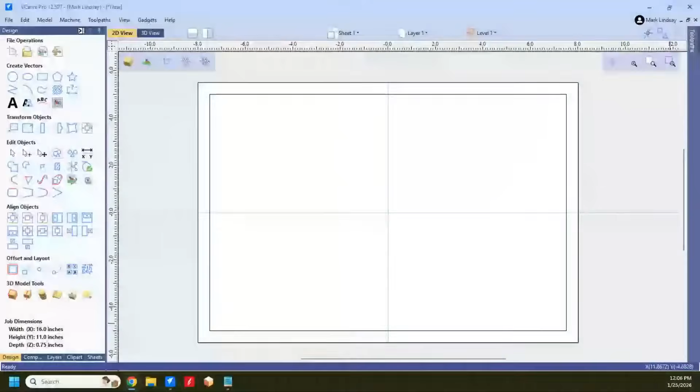Let me bring up VCarve Pro. Yeah, I'm in VCarve Pro, and I'll try to show you what I'm talking about. What I have here is a simple piece of material. You can't really see what's going on out here on the outside, but let me select, and you see I've got a vector out here that is the same dimensions as my material. Then I've got another vector right here, which is the limits of the pocket.

What I want to do is machine this area away all the way around the piece. It's, let's say, an inset panel, I'm using my hands like you can see me here. Let me do that. There we go. It's an inset panel that's going to fit into something else, but have a border around, an overlap. So let's go back to a spotlight on this.

So here's what we're going to do. Like I say, I've got that vector there and I've got this vector here. So I'll select them both, and I want to pocket this whole area out. Now I'm going to cut 1/4 inch deep, and I'm going to use a 1/4 inch end mill. In this case, the direction really doesn't matter. I'm going to use offset simply because I want it to go all the way around the material. And we'll go ahead and calculate that pocket.

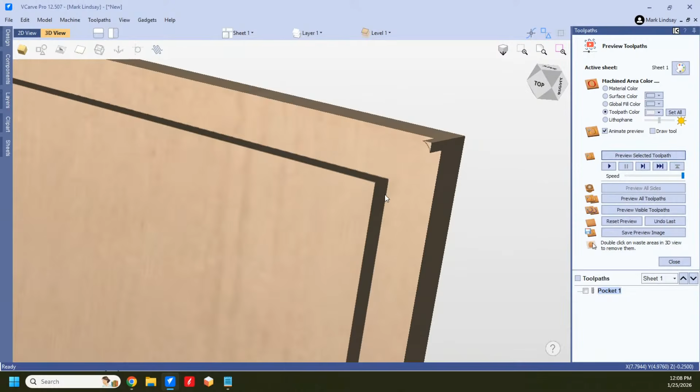I'm not going to get into the minutia of a pocket. There we see what the toolpath is going to cut, and now we'll preview the selected toolpath. Okay, now it's finished. The first thing we see is it has left these little corners up here. That is simply because we have to take into account the radius of the bit. It's going to come in.

Let's turn on the vector. It can't get into this corner, and this vector is the limit. So it's going to come up here as close to that corner as it can, then it's going to come around and go inside. This is the limit of the radius of that bit. It can't get in there any closer.

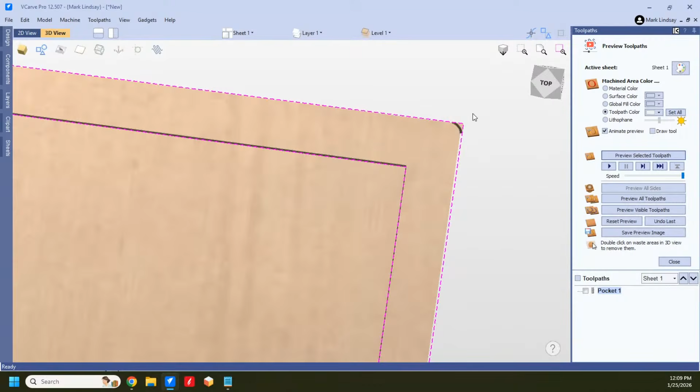So that's all well and good, but if we look down here, and I'll turn the vectors off so we can see, we have this ridge of material here. If we look a little closer, we also have this ridge of material here. Now this is common. And he was asking, why does it do this? What's the reason for this? Because we don't have the ridge over here on this side, and we don't have the ridge up here at the top. We just have it on this side and down at the bottom.

Now, I have asked about this in several places, and I get 2 or 3 different answers. So I don't have a definitive answer on why this happens. I've heard that it has to do with the radius of the bit. The radius of the bit explains the corners being left behind, but it doesn't explain why we have this ridge of material left behind down here and over here, but not up here and over here.

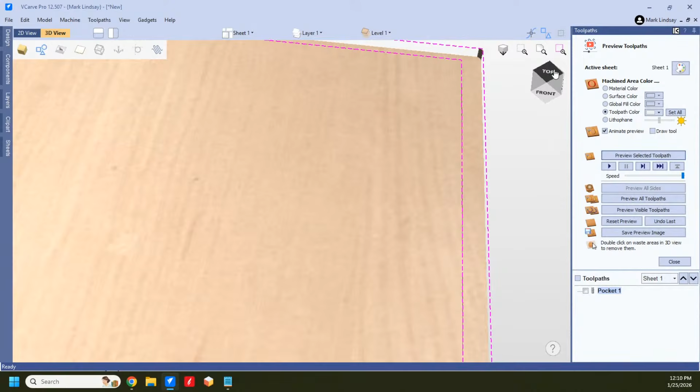I've also heard that it has to do with the way the toolpath is calculated, that it's calculated by using the center of the bit and where this vector here is. Now, if we zoom in straight from the top, we can see this vector kind of hangs over this edge a little bit. It's beyond the edge. Same thing up here, but it's right on the edge down here and right on the edge over there. Now, to me, that doesn't make sense. So it doesn't explain everything.

Now, Vectric says rounding errors. That's possible, but it doesn't explain the inconsistency. That's my question about the whole thing.

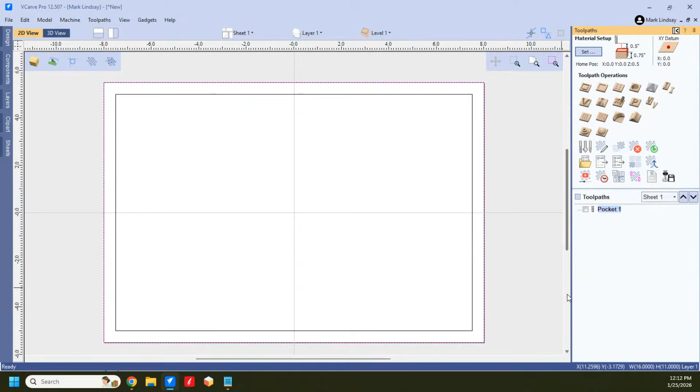Let me close this and we'll jump back over into the 2D view, back over to the design tab here. I'm just going to select this outside vector because that's the problem, and I'm going to, again, align it to the center to make sure that it is centered. So I have aligned it to the center. I'm going to jump back over here and recalculate that pocket. We'll reset the preview, and we'll see if that made any difference.

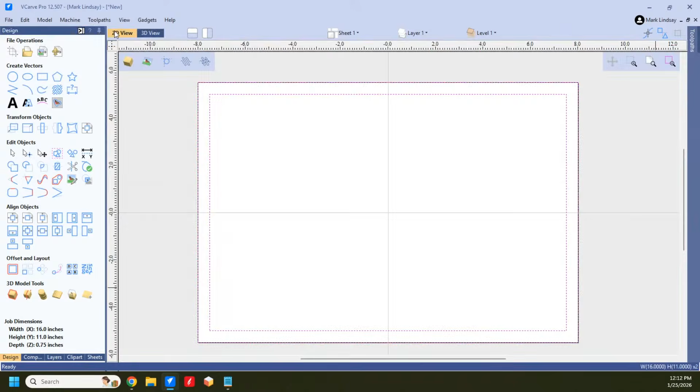And it did not. So obviously, that vector is centered. So what's my point in all this? My point in all of this is if you're going to create a pocket, like in this case, to create this rabbet, and the same holds true. Let me jump up here, close this to get out of the preview, jump back into the 2D view. The same is true if you're, let's say, creating a dado here for some reason. And we will make the width 0.5. Apply. I want a 1/2 inch dado across here.

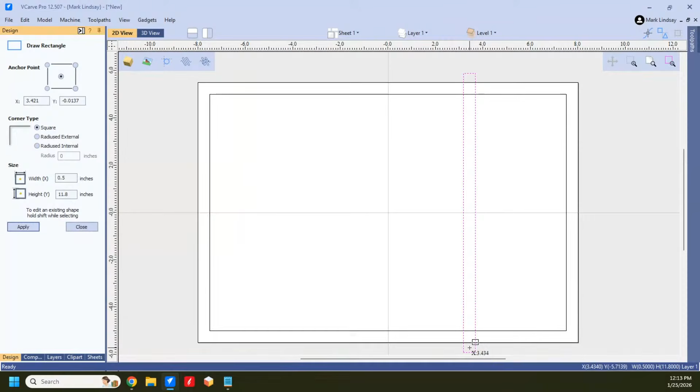Now, foreshadowing. You see here that this rectangle goes way beyond the material. It does that for a reason. That is, I want that bit to go past this edge and carve this away. I want it to go past this edge and carve all the way through this, not leaving that ridge of material. Now, I can change this. I'm in move and transform mode. Let me go ahead and bring that up and line it up right there. So it's going to end right on that edge, rather. And I've got it selected.

Let's pocket this down. Let's go 3/8 of an inch, so 0.375. And we'll calculate that. And we'll preview it. And we see it does the same thing. Now, I expected that radius, but it left that ridge there again. But if I look up at the top, that ridge is gone. And there's no ridge here. And that's simply because I made that rectangle larger than the desired cut.

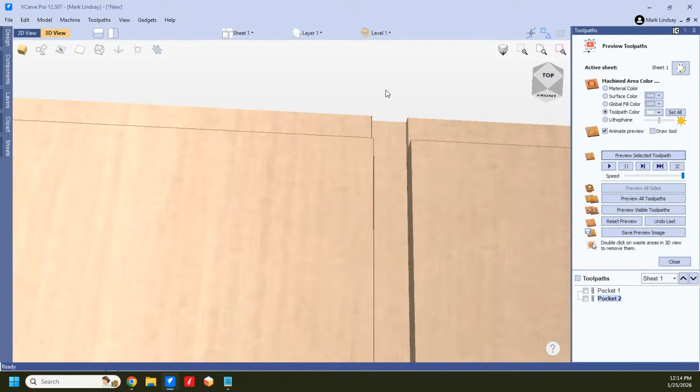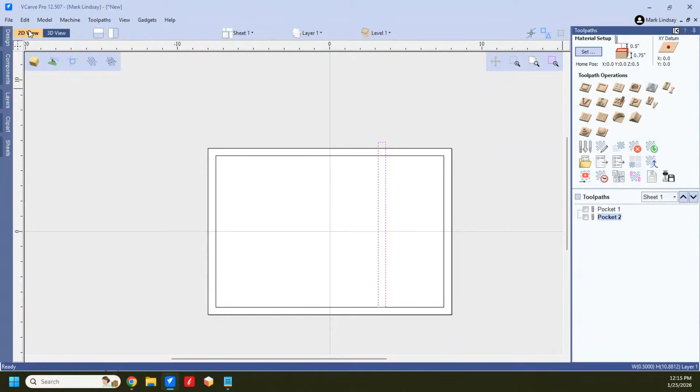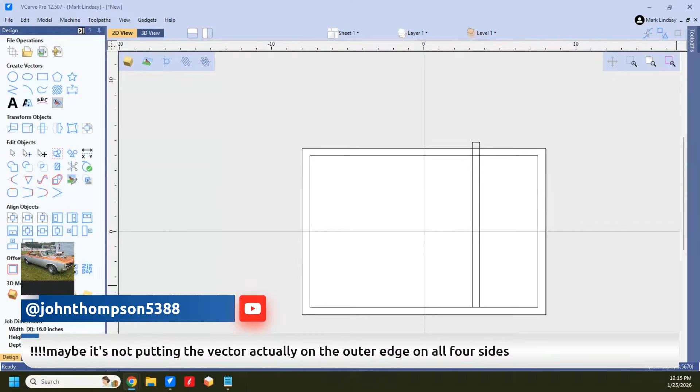So, I cannot explain why it does this. But it's been this way. I was taught to do this from the very beginning. If you're dealing with an example like this, let me go back over to the design tab here, where you have a ridge of material being left behind, and you have those radius corners that are not being machined away, the cure for it, basically, is to, okay, John Thompson says, maybe it's not putting the vector actually on the outer edge on all four sides. Yes, and that's what I was talking about earlier. I don't understand why it's doing it. I've been told two different theories, but nothing definitive. So the only thing I can say is we need to make this outer vector larger than the desired cut.

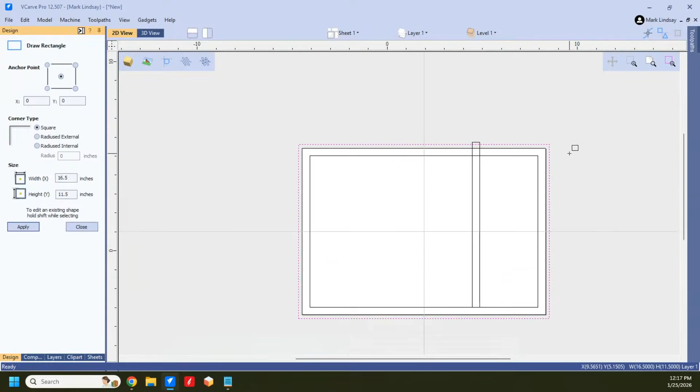So what I'm going to do is, I've got the rectangle selected, I'm going to go back into create rectangle. Now, any change that I make here is going to be reflected on the entire vector. So I'm going to add the diameter of the bit to all four sides. Because my anchor point is the center, I'm going to double the diameter of the bit. In this case, it's a 1/4 inch bit. Double that, we've got a 1/2 inch. I'm going to add a 1/2 inch to both of the dimensions. So we'll go 0.5 and 0.5. Then click apply. Now, that vector is a 1/4 inch larger here, and also at the top and bottom.

So I can close that. Oops, I added another vector. Didn't mean to do that. Now I'm going to put this one into move and transform mode. Click it again. And I'm just going to drag it out to where it's about the same as the larger vector. And I can drag this one in, snap it to that vector. And there we go. Whoops. No, I didn't move it. I did enlarge it. Okay.

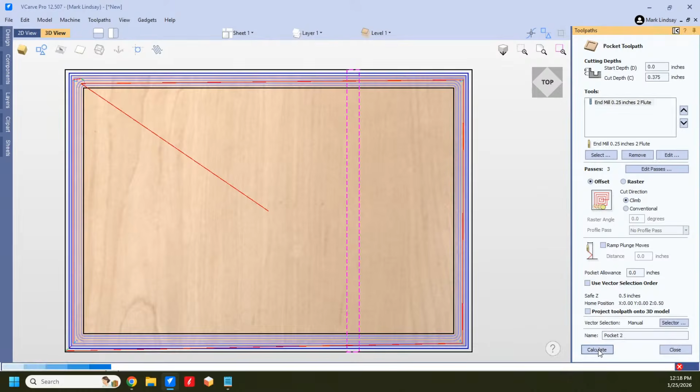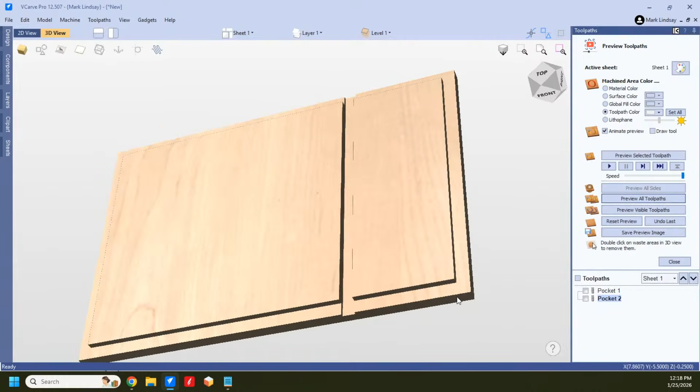So now I've got these. I can go back and recalculate the tool paths. So I'll go into this one. It has selected the two vectors. Recalculate. Go into this one. This vector is selected. I can recalculate. So now, when I preview them all, I get a nice clean dado, and I get nice clean edges, and those radius corners are gone. I don't have that ridge of material anywhere. It's nice and clean.

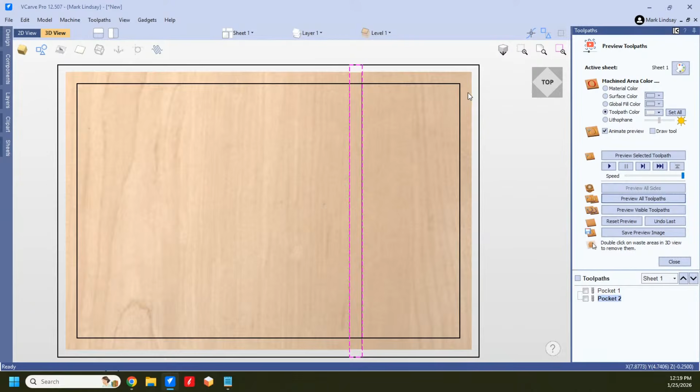So, it could be considered a workaround, or it could just be considered standard procedure. It is considered standard procedure if you want to get rid of those radius corners, to make the vector larger than it needs to be to cut away that corner. And you make it larger by the diameter of the bit. Now, that does mean it'll cut a little bit of air out here, and it may cut a little bit of air right here, but it eliminates those corners, it eliminates the ridge, and it eliminates the need for hand tool work after the fact.

Now, Bruce Malmstrom is asking, could you just use offset to the outside? Yes, you could. You certainly could just offset it to the outside.

As my friend Michael Mazalik likes to say, there are 3 answers to any question. This is what my English teacher would call foreshadowing. But yes, there's 3 answers to every question. So it could be anything from the radius of the bit to how the toolpath is calculated based on the center line of that bit or the center point of that bit.

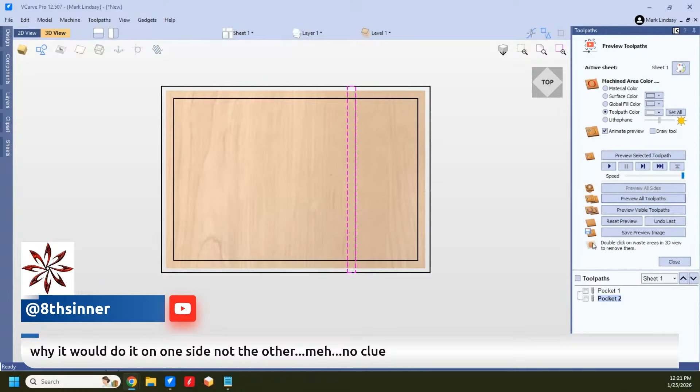Or it could be the tolerances number in preferences, that ridge perhaps being 0.006, for example. And that could be as well. That very well could be. And that's my question as well. Why would it do it on one side, not the other? No clue. Exactly. Does that explain why the ridge on one side and not the other? You know, I mean, you're a devious man, Michael.

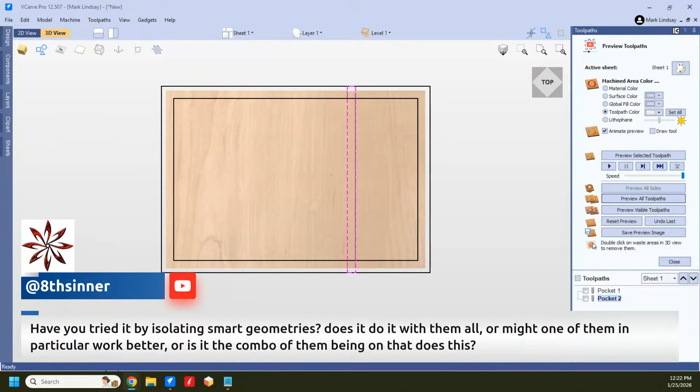Let's see here. There was another quote here. There we go. Have you tried isolating smart geometries? Does it do it with them all? Or might one of them in particular work better? Or is it a combo of them being on that does this? Isolating smart geometries, what I'm guessing you mean by that is, for instance, making separate pockets here and up here, and then separate pockets here. Yeah, that could be done as well. But again, there's no guarantee that it's going to cut the whole thing. And then you're dealing with two toolpaths rather than one.

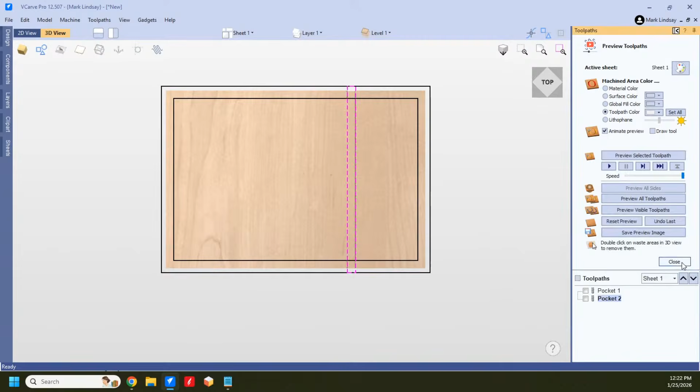Yes, you can combine them. And yes, you can merge them even. But I guess what was bothering me was the why. Not so much what I can do to get rid of it, because this is what I can do to get rid of it. Yes, I could offset that one outwards. If I want to keep that vector for some reason, maybe that vector needs to be a profile cutout to make sure this piece is perfectly rectangular. So there is a valid reason for keeping that vector right on the edge of the material.

So if I do need it, then offsetting it and not deleting the original is a good option. But if I don't need it, then just resizing this vector is another option. So it's, again, one of those little things that, let's see here. Jim Brown says, will that ghost vector be there on the dado as well? I'm going to have to assume, simply because I don't have an answer for that, if there is a ghost vector outside of the vector here, it would be the same for this vector.

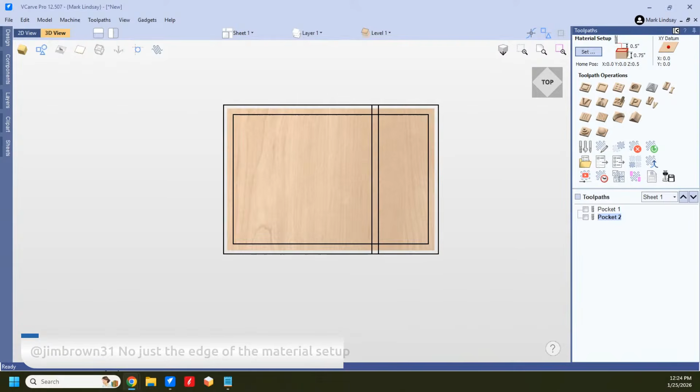So, okay, Mezalick says, no, just the edge of the material setup. Okay. Yeah, it's strange. Like if the bit geometry is 12 pixels, but the size is measured to be 11 pixels. I get that. Well, but that wouldn't show up in the preview. That would just be outside on the machine. The point is, in all of this, that I really don't have a definitive answer. There are lots of good variables. Each one of them could contribute just enough to where that's the end result.

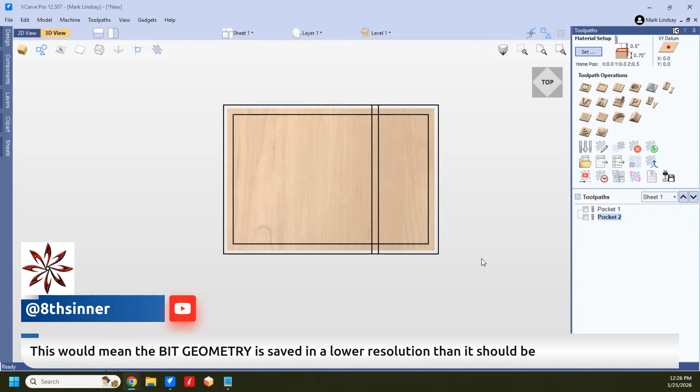But to me, it doesn't explain why it only happens in certain positions. Like in this example, that ridge was along the left side and the bottom, but not the right side and the top. So this would mean that the bit geometry is saved in a lower resolution than it should be. The only problem with that theory, and I'm playing devil's advocate here, is that it wouldn't explain why it's only happening on 2 of the 4 edges. If the bit geometry is saved at a lower resolution than it should be, that ridge should be on all 4 sides. So you may be 100% correct, but that doesn't explain why it's only 2 sides.

Does this mean that if that's an inside dado, one side will be undersized? It could very well be. It could very well be.

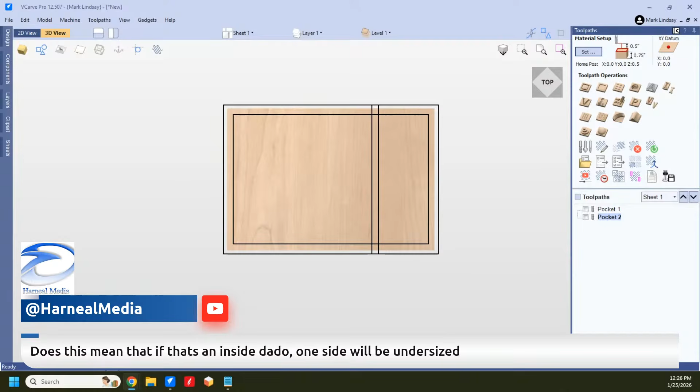So, dados are, I won't say they're a separate science, but dados can be difficult to get. Aha, here we go. Michael, I think you've got something here. The software reads from left to right, bottom to top. So those are the first edges to be calculated. It's all falling into place.

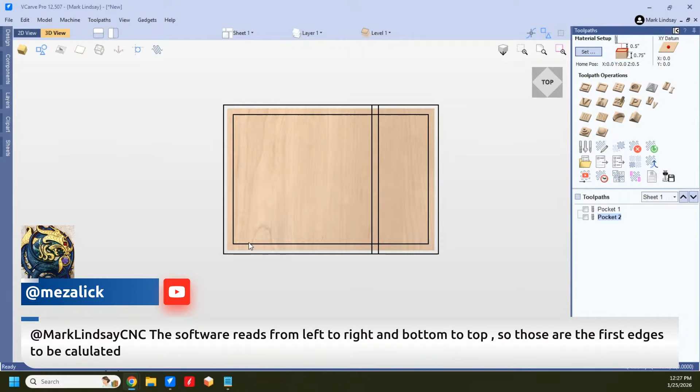So if there is a ghost pixel, oops, I'm pointing at the wrong screen. So if there's a ghost pixel, let's say down here on this corner, it's going to move that edge in 1 pixel to the inside. Interesting. Interesting. I'm going to have to play with that. Very interesting. Okay. Yeah. Man. Yes, the ghost pixel will always be only on the same 2 sides.

Now, you know, Michael, that's some brilliant insight and something that I had never considered. Now, I knew that the software, when you're creating a 3D model or a composite model in VCarve, when you've got 3 or 4 different components, I knew that it modeled from the bottom up. But I did not know it calculates the toolpath starting at the bottom left corner.

Says in older versions of the software, you could see the ghost pixel. Interesting. I don't know if I ever noticed that. I started with the trial version of VCarve Pro 7.5, learned a little bit, and bought VCarve Pro 8.0. And I don't remember seeing it, but I didn't know to look for it, you know.

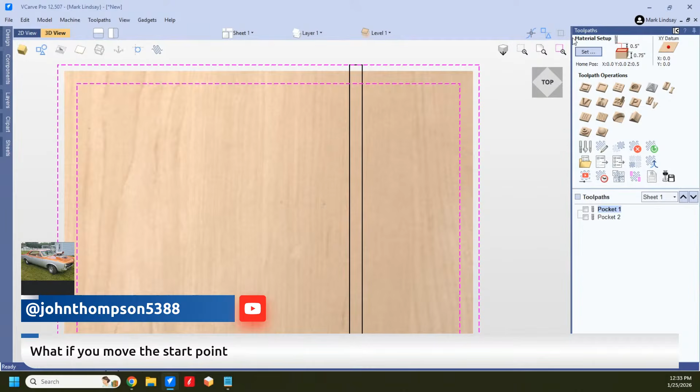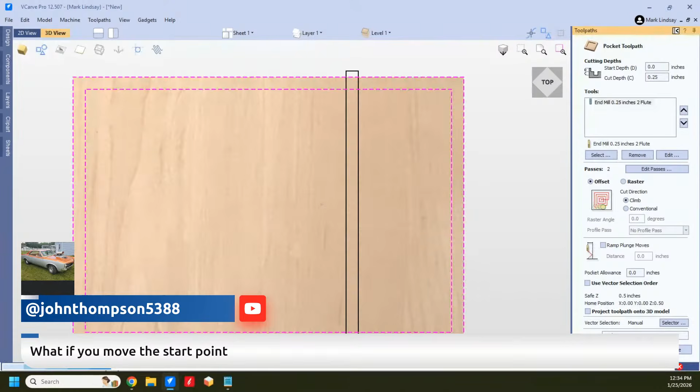Nope. Oh, nope. Let me reset the preview, close the preview, and now go back over to the design tab here. Select this one and get rid of that 1/2 inch. All right, apply, close, shoot over here, and we'll back into that pocket. We'll recalculate it, and we'll see if moving the start point up to here changes it. Boom, boom, boom. No, moving the start point does not change it.

So, all right. So, no. Start points don't matter with pockets. Okay, I see that now. All right.

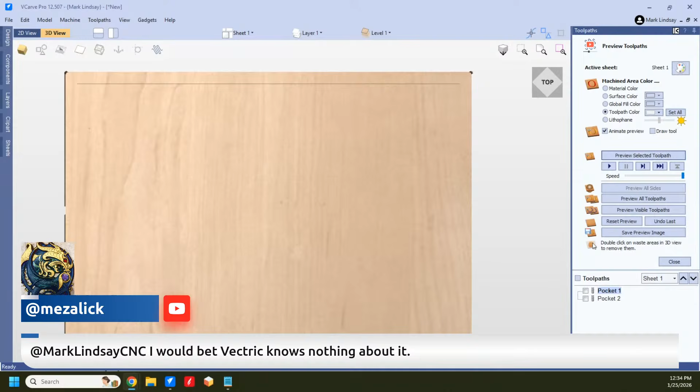Mezalick says, I would bet Vectric knows nothing about it. Well, then, I have one answer to that, and that is, let's tell them. Let's think about that for a second. We can't be the first people to notice that, ask that. Then again, maybe we are. Maybe folks have just accepted that, well, you make the vector larger than it needs to be so that it carves it out. Well, exactly. So,

I know I have a limited audience, but right now there are 64 people watching this. If, say, 10% of us, that would be 6.4. And as far as the 0.4, you know who you are.

Let's shoot Vectric support and ask them about this. Why does this do that? We know the workaround. We know how to get rid of it. But why does it leave this edge? I'll bring up the ghost pixel thing. But let's find out why. I want to get a definitive answer. I'm not going to put out a call to action or anything like that. Let's, yeah.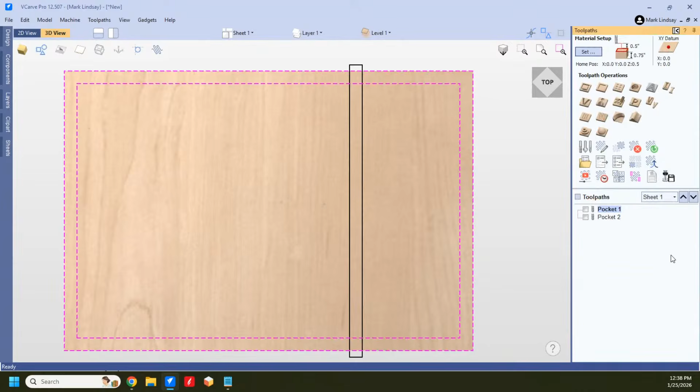Ralph says, since the XY is on the center, could it be that the centers of the rectangles are not the same? Let's check that out. Reset preview. We'll close the preview, jump back over to the design tab in the 2D view. Zoom in, and I'm going to do it separately. So I've got this rectangle, and I'm going to align it to the material vertically and horizontally, so it's in the center. Then I'll do the same thing here.

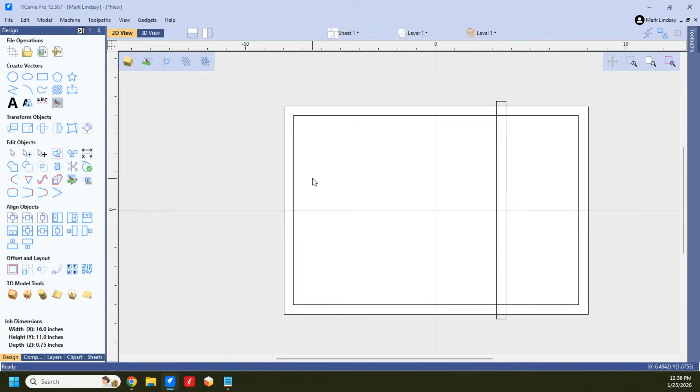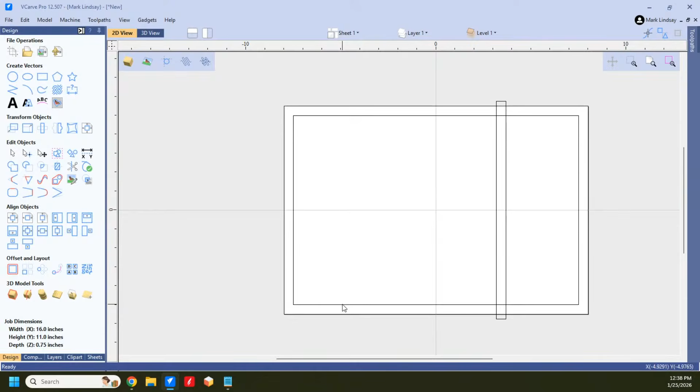And that's a point to bring up. I did these separately because if I selected them both together, it would set up a bounding box around both of them and then move these in relation to that bounding box. It would not make sure that each vector individually was in the center. So now that I have them both in the center, let's go back over and we'll recalculate that toolpath. Calculate, and we'll preview it. And no change. No change.

8 Center says, my bet is on the resolution dimensions of the saved bit geometry part not being kept up with the resolution changes over the years. I really honestly don't know. So,

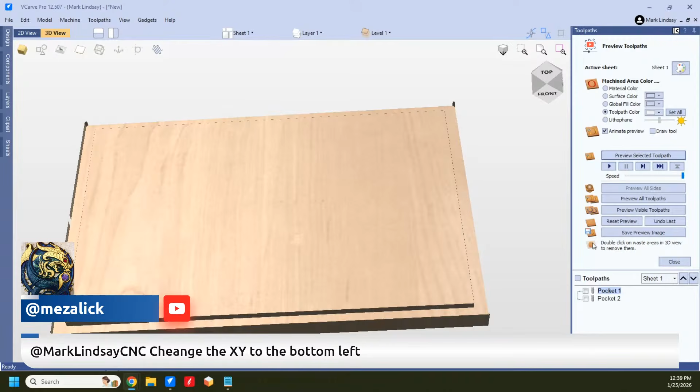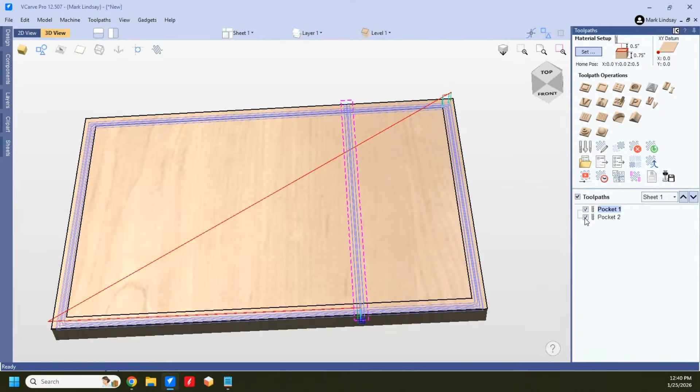Michael says, change the XY to the bottom left. Okay, we'll do that. And we'll reset the preview. Close this. I'm going to go over here to material setup, and I'm going to change XY to the bottom left corner. Click OK, and now it says all the toolpaths must be recalculated. Yes. All toolpaths were successfully recalculated. Uncheck those. Let's go back into preview. Pocket. Let's check. Same thing. No change.

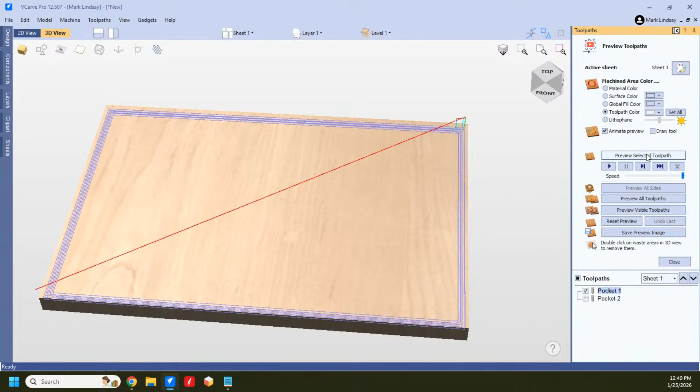Now, just to make sure, reset preview, close. I'll jump back over into job setup. And our XY datum position is in the bottom left corner. Okay. And jump over here, and I will recalculate this. And we'll preview. And no change. So,

I'm going to investigate that goat pixel thing. Goat pixel? It's been a long week. Ghost pixel. All right. Uh-oh. Yeah. So, that's it. I have no answer. You got me. So,

I'm going to shoot an email to Vectric support and ask them about it, including some screenshots. And I will mention the theories that I have heard, all three of them, and see what they have to say. Maybe this is something they can fix. Maybe it isn't, and we just have to deal with the workaround. But as Michael said, in version 4 and earlier, that pixel was visible. Why is it not visible now? And why is it there to begin with? So, I don't know. I really don't know. But it's an interesting topic to investigate.

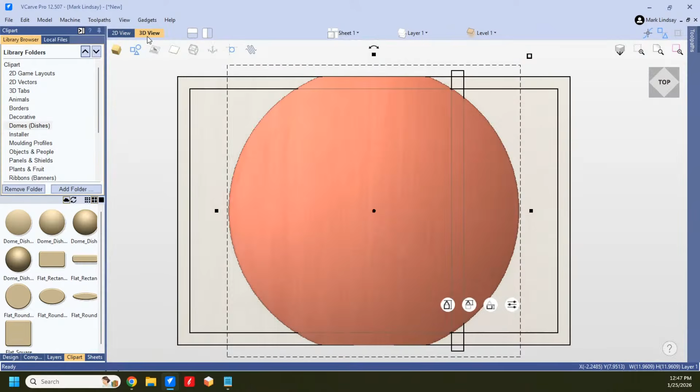to take, let's say a dome here. Let's go with a very gentle dome. And let's make it big. Hold down shift, so I'm going from the center. So I've got this gentle curve here. And in fact, I'm going to bring that down. So I'll click on this. I don't want it that high. I want it 0.25, and hit enter. Just a very gentle dome.

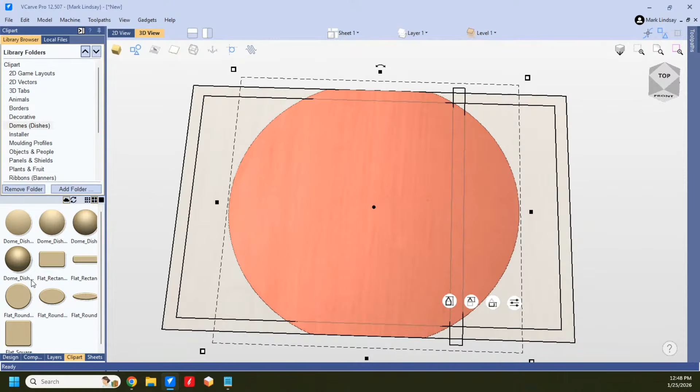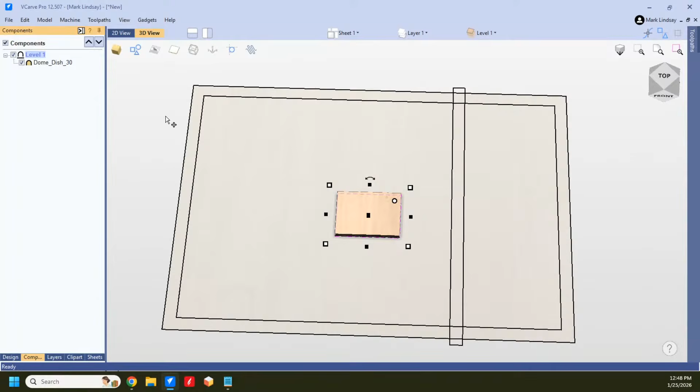And I will come back over here to design. Draw a rectangle. And remember, I'm in VCarve Pro. So there's a rectangle right there. Close, go into components, select the level, right click, level clipping, apply. So now I just have that gentle dome shape right there. Now I want to create a molding toolpath, let's say for something U-shaped here.

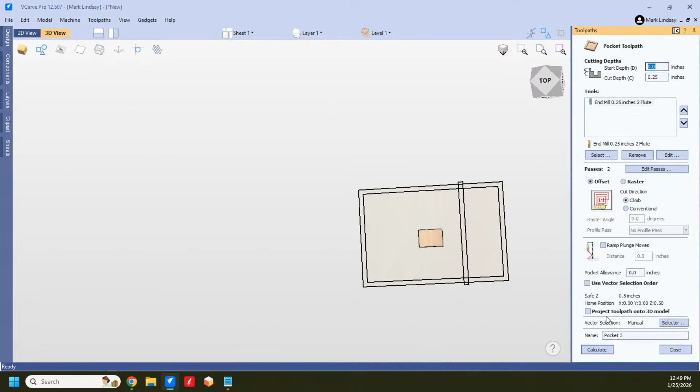If you go over to the profile, material setup, okay, we're good. No, don't calculate. If you go to the profile, come down here, you can project that toolpath onto the 3D model. Oops. I think it's in Pocket. Is it in Pocket? Yes. Project toolpath onto 3D model. Close. If I go to VCarve, project toolpath onto 3D model. The ability to project a molding toolpath onto the 3D model, I could see where that would be a huge benefit.

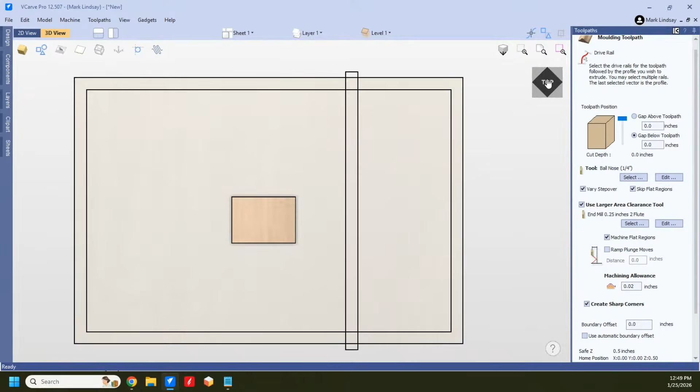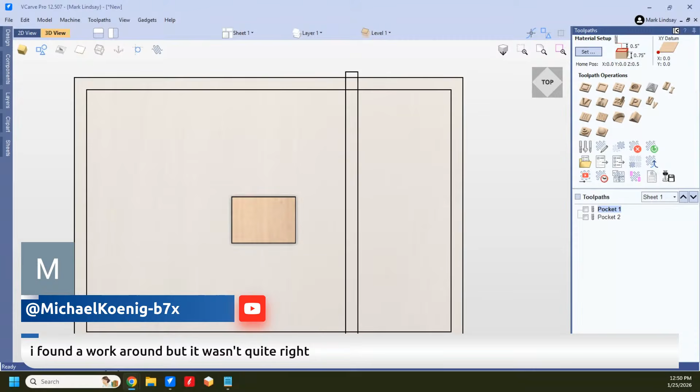So, an email to Vectric support with the subject being feature request. Request the ability to apply a molding toolpath to a 3D model. Yeah. Interesting. And that's a great option, or would be. Michael says, I found a workaround, but it wasn't quite right. I get it. I take it you're using VCarve Pro, so you don't have the ability to create a model as if you were in Aspire. That's also a problem there.

But here, let's see. There was another question up here. Dusty Woodcutter says, can you show where you can select toolpath colors? I can't seem to find it all of a sudden. Okay, yeah, that is over here. Bring this back.

We've got to be in preview. So I've got Pocket 1 selected. We come up here into machined area color, and you'll want to select toolpath color. Then you can come right over here and click on that drop down menu and you get this. And we'll make this one blue. And we see it's turned the toolpath blue. And we got the little blue rectangle right there next to the illustration of the bit.

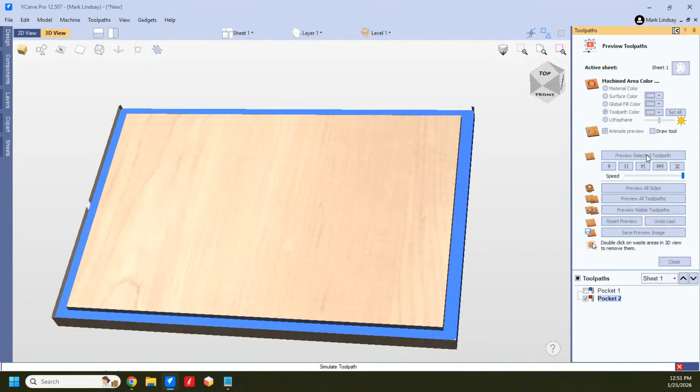And now I'll select this one, toolpath color, and I'll make it red. No, not pink, red. There we go. Now, it has not been machined yet. That's why it's not red. So now I'll machine this. Preview selected toolpath. Boom. Now it's red. Okay. So, reset preview. No colors appear. But that's where you change the color of a toolpath.

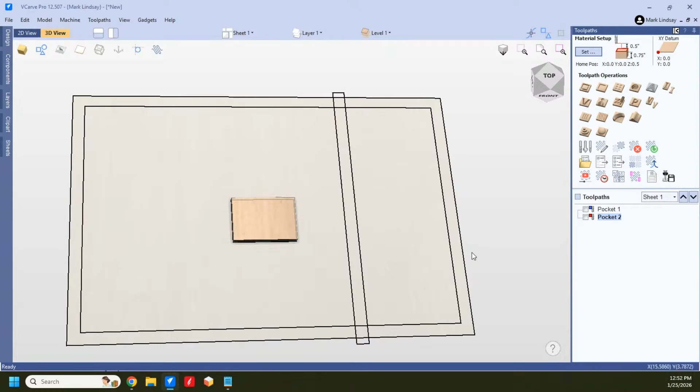Mark, when I import an object or photo, it comes in as double lines. Is there a way to have it come in or convert it to single-lined object? Or is the only way to delete the items using nodes? Double lines. I'm guessing you're talking about bitmap tracing. Comes in as double lines. Okay, let me ask this about that. Are you talking about trace bitmap?

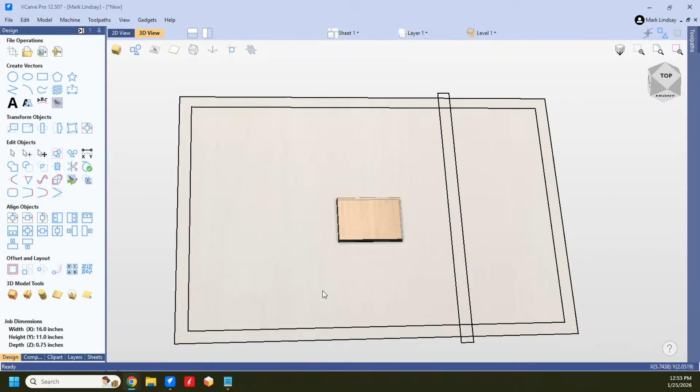Let's come over here. Go back to the design tab. You're talking about right here in the trace bitmap. It is going to trace with double lines. If you're not talking about that, let me know what the situation is and what you're talking about. I'm going to get rid of that because it's distracting. Boom. And I'll get rid of that because it's distracting. So,

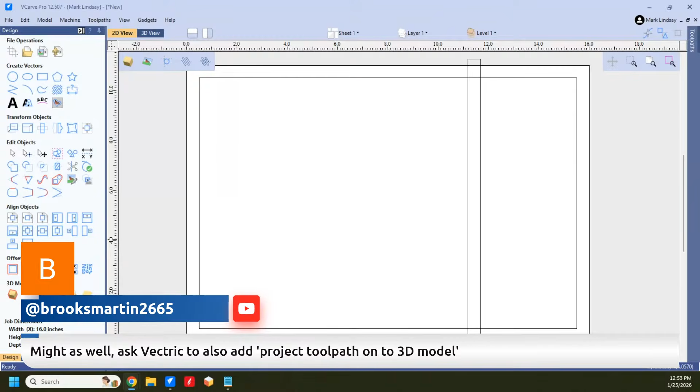Brooks says, might as well ask Vectric to also add project toolpath onto 3D model for the chamfer toolpath. Okay. For the chamfer toolpath, I'm going to be honest, Brooks, I've never used it. I create all my chamfers using profiles. I just haven't had occasion to use it, but I do need to get into it.

Okay, Rocco says, yes, talking about trace bitmap. All right. I don't have a bitmap to trace, but you are always going to get double lines in tracing a bitmap because the software works with closed vectors for V-carving.

So let's see, can I find a bitmap? Where would I look for a bitmap? Man, trying to think of a, well, let me do this. Let me go into here, and we'll find a bitmap to trace. Yeah, let's do this because I've already done it once. All right, that's a bitmap I'm going to trace. Okay, so it's called 40 Ford Coupe Hot Rod.

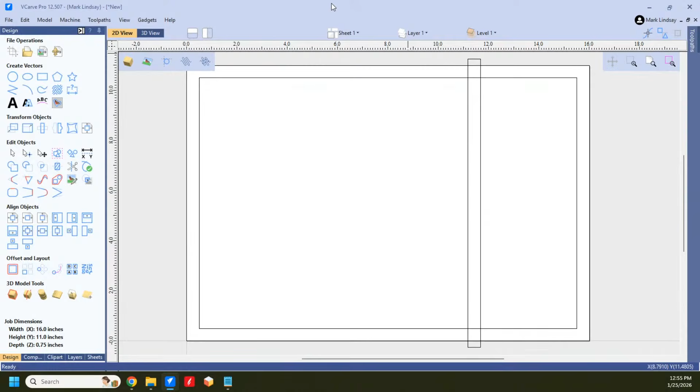We will go import bitmap. And I'm going to go to CNC stuff. And it was 40 Ford. Come on. Come on. There we are. 40 Ford Coupe Hot Rod. All right. I'm going to get rid of the other vectors here. So let's get rid of this. Delete. All right. Now, got my bitmap.

I need to make it slightly smaller. Hold down Shift and scale it down. Pro tip, do not scale up bitmaps until after you've traced them. You'll get the best resolution that way. It's okay to scale them down, but don't scale up. Okay?

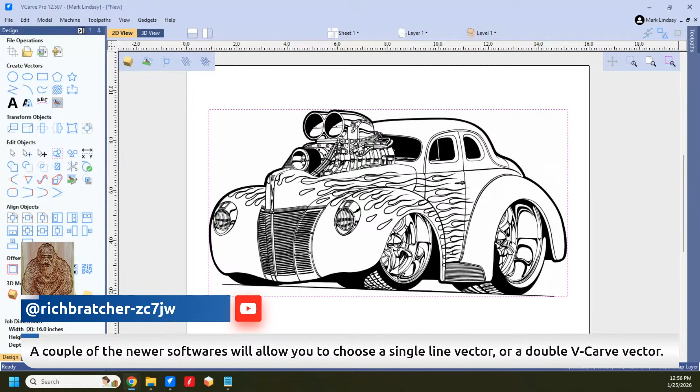Rich Bratcher says, a couple of the newer softwares will allow you to choose a single line vector or a double V-carve vector. Yes, they will. And this is a valid point. This may also be a feature request. And I've said that a lot today.

Vectric does listen to feature requests. That's where they get their ideas for the updates and the upgrades. They do listen to feature requests. So don't think you're screaming into the void. You're not. But also remember that the squeaky wheel gets the grease. So something that's really popular is going to get analyzed before something that's not popular at all.

Okay. So back to the topic at hand here. I want to do a bitmap trace on this. Now this is pretty busy. It's got a lot of lines here. So we'll go in here to bitmap trace. Now the first thing it's going to do is ask me about color. Do I want to go with color or black and white image? This is a black and white image. So let's take a look at black and white first.

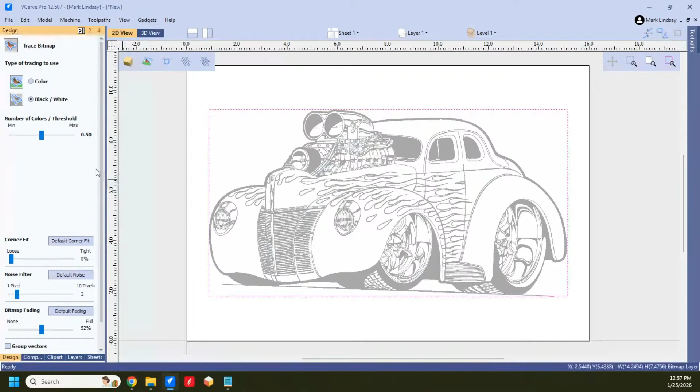Now it's going to ask me about the threshold, the number of colors. In images like this, it may appear to be black and white, even though I just said it's a black and white image. It's actually grayscale. There are 256 different shades of gray, regardless of what that book says. There are 256 different shades of gray. This will pick them all if you start going to minimum and maximum.

But you see that? Now we've got it selecting too many shades of gray, and it's leaving nothing but the absolute white behind. What we want to do is we want to adjust this so that we're getting the detail we want, especially down here in the grill, and not leaving a bunch of little bitty fragments in there. There's a balance.

I'm getting more and more detail. Now I've got good detail here. Can back up. I'm getting good detail up here. There are still some rough edges, but that's okay.

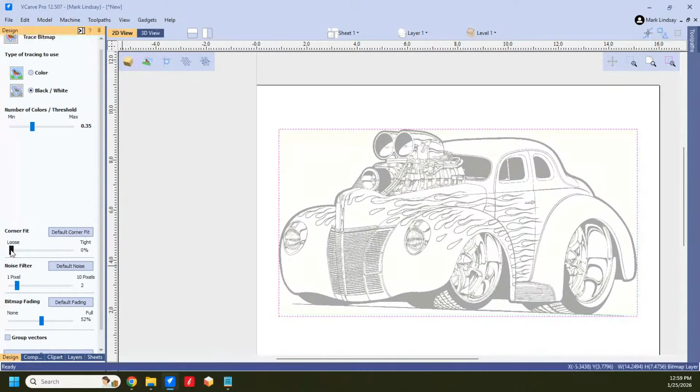Now, I've got my corner fit, meaning how true to these edges is this going to stick? Is this tracing going to stick? It's set at loose. My noise filter, meaning if I've got something out here that's 1 or 2 pixels, is it going to trace it or is it going to reject it? And bitmap fading, just simply how much fading I've got on the bitmap while it's doing the trace.

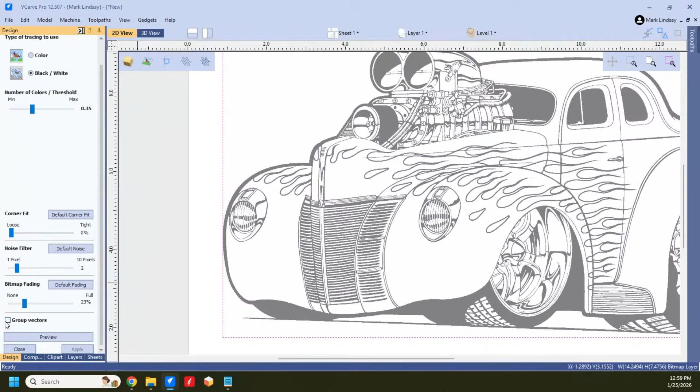I have the option to group the vectors. Generally speaking, I don't group them if I know I'm going to have to come in and do a lot of editing, because if I do group them, before I can edit, now I got to ungroup, so I don't bother.

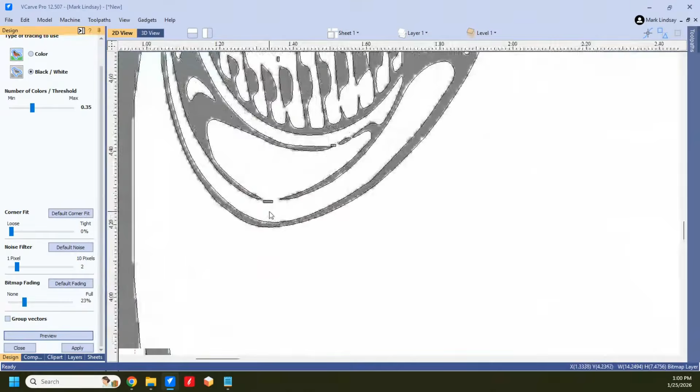Now I can preview. And that's going to show me the vectors it's going to apply. I think I can live with this. I've got a few little spots like this one here. It's just a little rectangle. This is considered noise. I can move this up, say 7 pixels, meaning anything less than 7 pixels like this is going to be rejected. Preview, and now those little spots are not there.

However, did I just lose a lot of detail? Now I got to go around and look around. I think I'm okay. I'm missing some little things like this down here, but looking at the grand scheme, is that really important? To me, no. I'm going to go ahead and apply that. Then I'm going to close it. So it's done the trace.

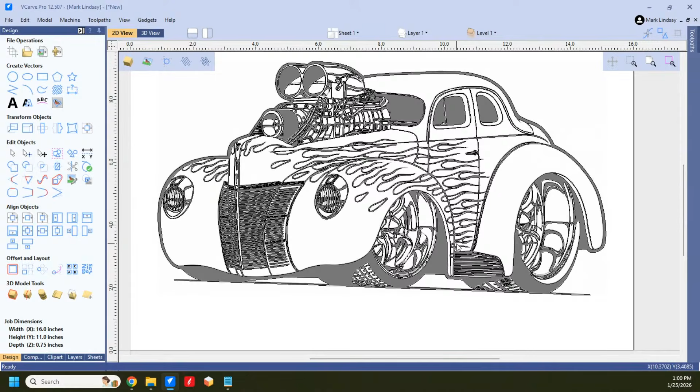Now I can come up here and I can turn off the bitmap layer. The minute I import a bitmap, it puts it on its own separate layer. So now I can turn off that bitmap, and there is the trace. Now, I got to look over here and see how much cleanup I need. I got some good definition here in this grille.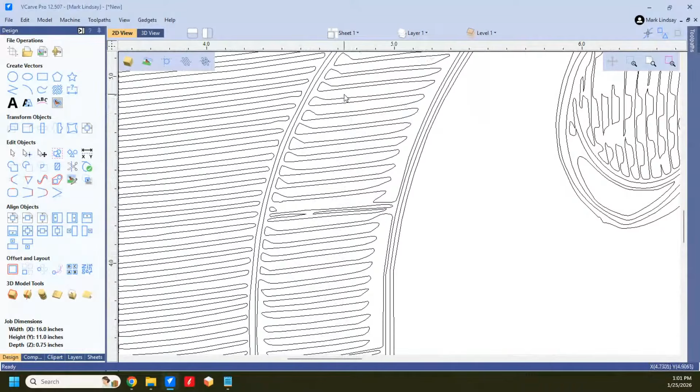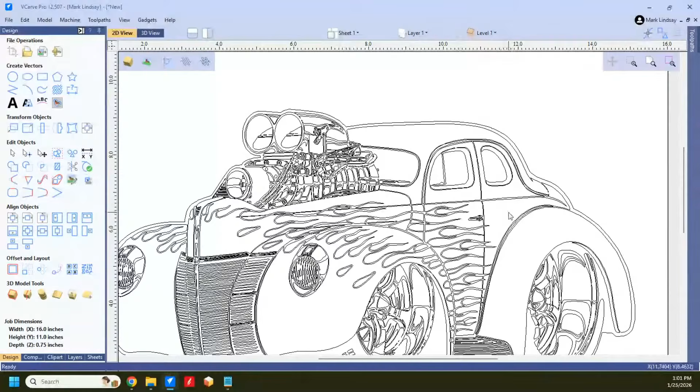This is a little bit funky here, but I think that that is part of the design, so I'm going to leave it alone. I got some little spots down here. I'm going to leave them alone as well, because again, it's there to give you an impression. It's not a 100% perfectly true representation, but it's good enough. Now, did it create double lines? Yes. And here's the reason why.

If I hold down Control and tap the letter A, it selects all of these vectors. I come over here to VCarve toolpath, click on that. I am going to go with a flat depth of 0.1. More often than not, that is my default. I do my VCarves 0.1 unless I have a need to go deeper.

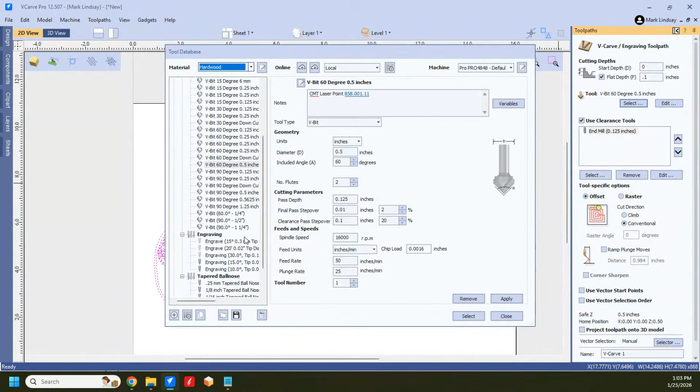This will not force the bit to cut 0.1 deep. This is a limit. It will cut no deeper than 0.1. That's all this is. That's all a flat depth is. It will not force the carve to go 0.1 deep. It's a limit. Okay, this is using a 60-degree V-bit. This is pretty large. I'm going to go with a 90-degree V-bit, simply because that's my go-to.

Use the clearance tool, 1/8 inch end mill. I'll go ahead and do that. I'm going to go with offset just because. And I'm not going to concern myself with anything down here. Calculate. Now, may contain overlaps or intersections which may lead to unexpected results. Would you like to use the vector validator? I'm not going to do that now. I'm going to continue anyway. We'll see what it looks like.

This is a convenience thing because you can drive yourself nuts chasing overlaps. But if it doesn't change the overall look, if you get the overall look you want, you're fine. Preview early, preview often. If you don't like the preview, change it. You can always come back and use the vector validator. So I'm going to continue anyway, just because.

And now I'm going to change the toolpath color. I'm going to make it black, just so you can see it. I'm going to come up to the clearance, and I'm going to make it black, so you can see it.

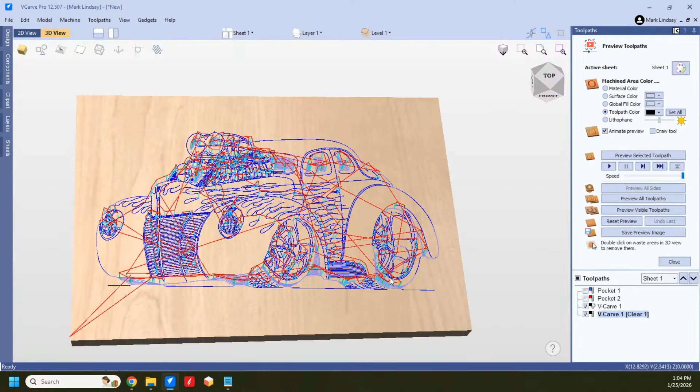Now, conventional wisdom says to run your clearance pass first, then run your VCarve toolpath with the V-bit. I do that just the opposite. I always VCarve first. Always. I get a much better finish. Let me turn off the clearance.

I get a much better finish if that bit is following this line in uncut material than if I were to come in and try to cut it after this has already been cleared out. I get less chip out. I get less breakage of small pieces. I always get a better result when I run the V-bit first.

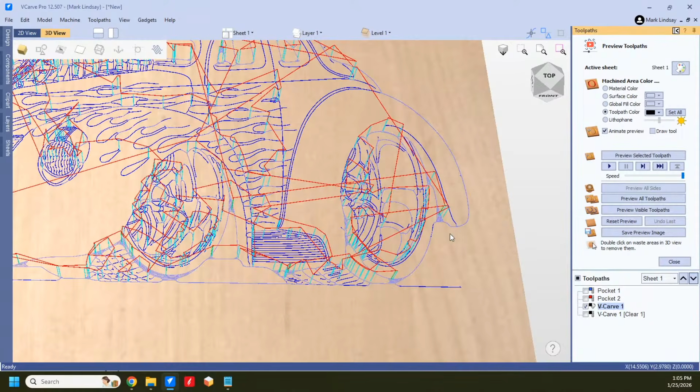So that's going to be the first one I preview. Zip out here. Hello. Preview that toolpath. Looks pretty good. Now I'll do the carve, the clearance. Looks even better. Now, why did I show all that? I showed all that to show you why you get double lines.

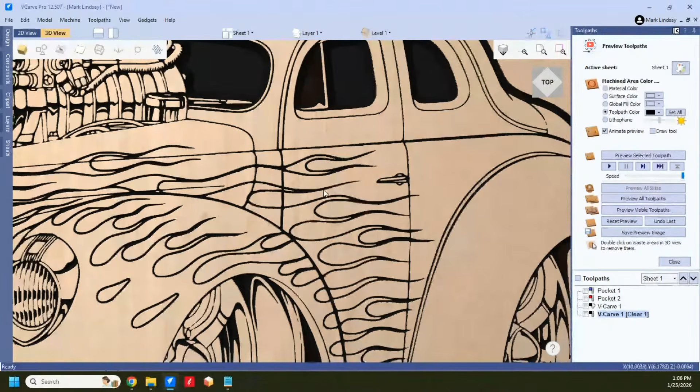Because the software needs these double lines so that the V-carve toolpath knows where to carve. It doesn't carve this entire area. It carves the area between those vectors. That's why it gives you double lines. Now, what if we don't want double lines? What if we just want single lines?

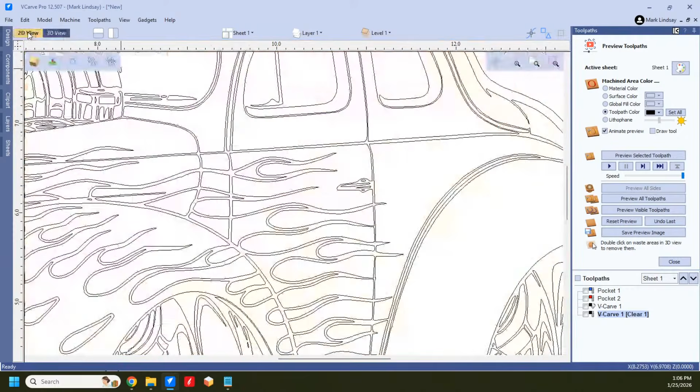Yes, you could go through here and you could clean all this up using node editing. You could get in and you'd have to figure out what you want to do. Like this area here, this is what carved. If you just want a single line, you're going to have to go in and do a lot of editing up in here where this joins.

Now you do have another choice, and that is to select the vector and do a profile toolpath carving on the vector. That's one way to quote unquote V-carve open vectors, and it does work, but you're also not going to get square inside corners.

Simply because on a V-carve toolpath, the bit as it finishes, say this area here, and goes to make a corner, the bit's going to lift up and come up out of the material and square off that corner. Whereas if you do a profile, it's not. It's just going to follow that vector and stop, then move off in another direction. It's not going to square off that inside corner. So that's why it does double vectors.

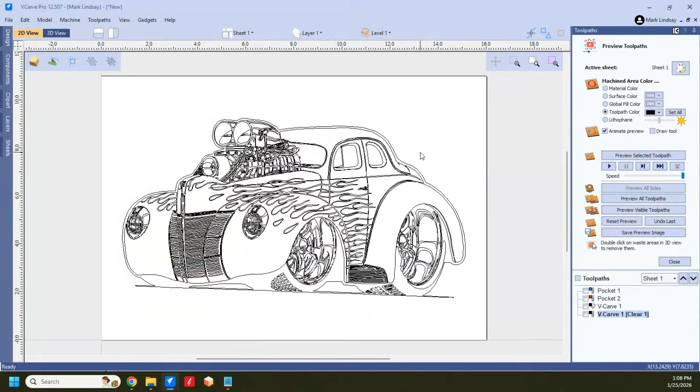Having said that, and I get it, there are cases where you want a single line. And this is where a feature request comes in. I think I'm going to add to the title of this live stream and call it the feature request episode.

There is legitimate reason, especially if you use laser and you want to laser this instead of V-carve it. And let's say, for example, you want to laser it onto a curved surface. There is a legitimate reason to need single lines. I think adding up here, type of tracing to use, center line should be an option so that it follows the center line.

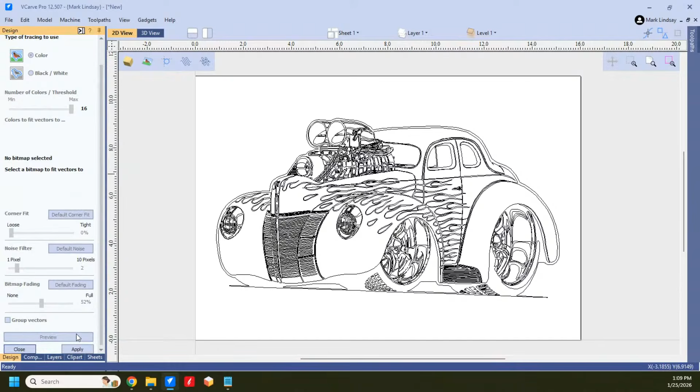Let me close this here real quick. Let me turn on the bitmap and make that the active layer, and then turn off the tracing. Instead of it drawing a vector to the outside of this area here and another one to the inside, having the option to have it select a center line of the drawn line here, I think that would be a good option. So, once again, feature request.

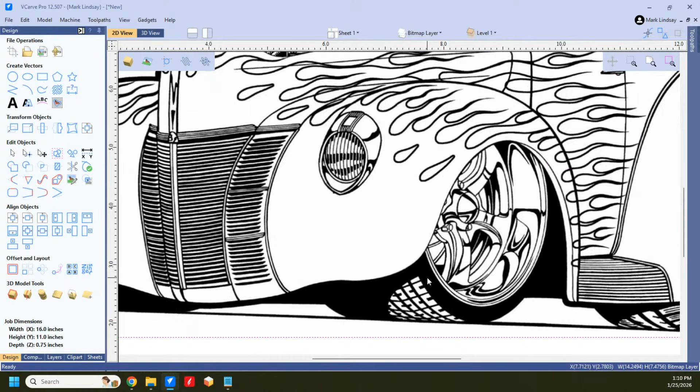Here's a caveat to that. That would work well for areas like this where you have thin lines, this body sculpture line here, or the outside perimeter here. But what about when you get into big areas like this? Where's the center? Are you putting the center here in this? What determines where that center should be?

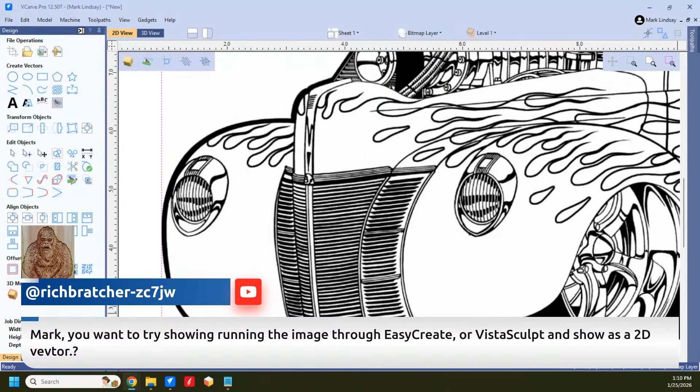Okay, Rich Bratcher is asking, Mark, you want to try running the image through Easy Create or VistaSculpt and show it as a 2D vector? Not just yet, Rich. I'm ashamed to say I have not yet tried Easy Create.

I really am ashamed to say that. And it's simply because it has fallen through the cracks. I have so much going on. I haven't had, and it's legit, I haven't had the time. I need to do it. And thank you for reminding me. I'm going to write myself a note right now to get in, buy some credits, and play with it. Just wrote myself a note to get in there, get some credits, and play with it.

Is that for another day? As it sits right now, yes. But is that already in Easy Create? Because if it is, that tells me that Vectric knows there's a need for it. If it's not in Easy Create yet, feature request.

Oz Guzzi says, Easy Create is cool. I've seen some brilliant work come out of it. My problem is I'm pulling in several different directions at the same time. Okay, Rich says that it is part of Easy Create. Okay, so that tells me they know.

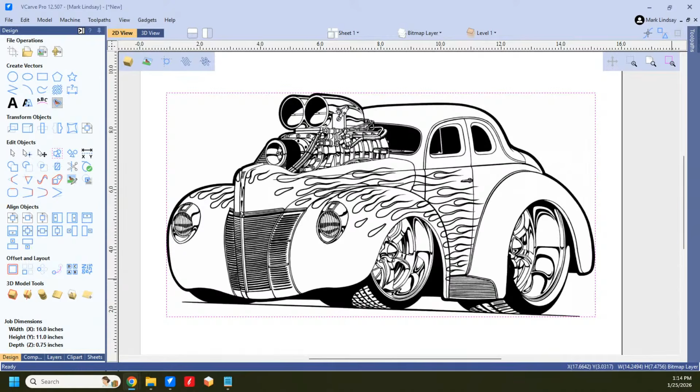No prompting from the studio audience, please. Inside joke. Yeah, I like to think I'm retired, but no. Let's see. It is technically a quantum possibility. If you can force brain entrainment into the lambda brainwave state, it creates a sort of time dilation effect. That's a lot to unpack, and it's above my pay grade.